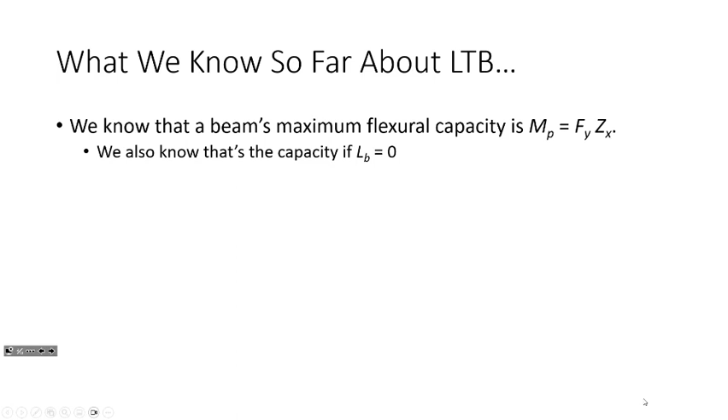Now, we do have an elastic solution for lateral torsional buckling. And the elastic solution is what I derived last time in the previous lecture, and we ended up getting a solution that looks like this. And to be clear, we are actually going to use this solution. Algebraically, it's going to look different, but it's the same equation. Now, that is an elastic solution, and you're going to see what I mean there in a bit.

Now, remember that our solution, when we did this, assumes that the moment is constant. We did that because it made the solution of the differential equation easier to do. But we know that bending moments are not constant. You all had a homework problem where they weren't. We had a moment diagram where the moments were variable. And we do have a way of correcting that solution with this term CB.

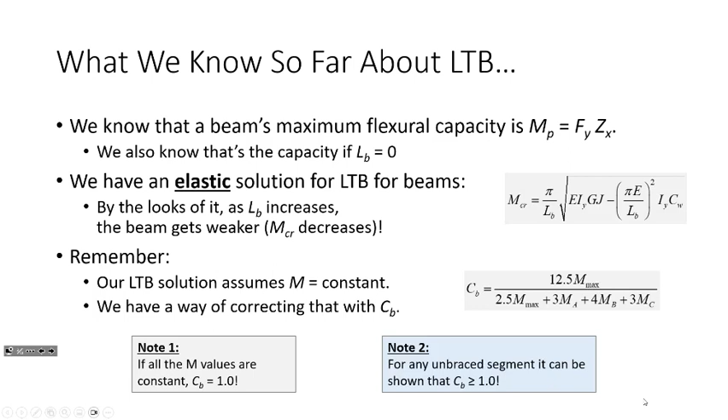Now, one of the things about CB is that CB is greater than or equal to 1. Every CB value that you computed on the last homework assignment should have been bigger than 1. And so what CB tends to do is increase the capacity. But no matter what you do to increase the capacity, it is limited to the plastic moment. So if I'm looking at my plot, whatever the plot looks like, I can't have a capacity above that line. It can't go over MP. That's the limit.

Now, in order to explain the flexural capacity expression for beams, I want to go back to columns for a bit, and I want to talk about how the column curve was arranged. If you remember the column curve, we derived a solution, and then we said that solution's great, but it's not good enough. And there were 2 reasons why. The first was geometric imperfections, the idea that columns are not perfectly straight or perfectly plumb.

But then the other aspect was residual stresses, the idea that there are stresses locked into the member that propagate yielding throughout the member faster than if we assume they don't exist. And so what we ended up doing is we had 2 zones of flexural capacity as it relates to column buckling. We had an inelastic column buckling range and then an elastic column buckling range.

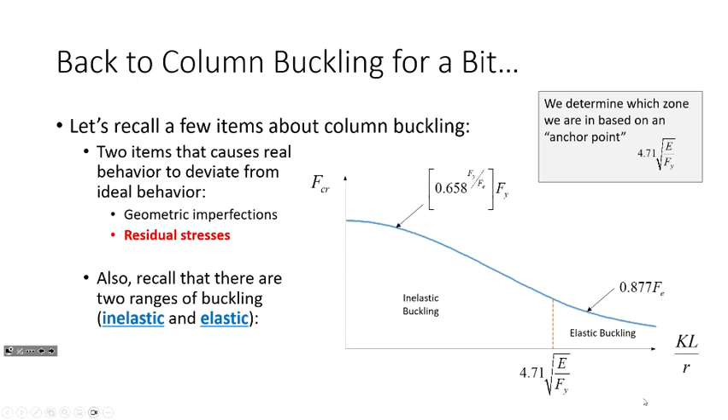And so what we would do is compute our slenderness and compare it to this value, and we would say, well, if our slenderness is less than or equal to this, then we're in zone 1, and this is our critical buckling stress. Otherwise, if we're greater than that, we're in our elastic buckling range. So we had these two zones to consider for column buckling. Does that make sense?

Okay, so now I want to talk about buckling for beams. For beams, we're going to have 3 zones of capacity. Now, the 3 zones of capacity are essentially as follows. We have zone 1, and in zone 1, what we assume is that the capacity is just MP.

It's just the plastic moment. And what we're saying in zone 1 is that the braces are so close together that we really don't need to consider the effect of buckling, and we can just assume that the capacity is MP. Then we have zone 2 and zone 3.

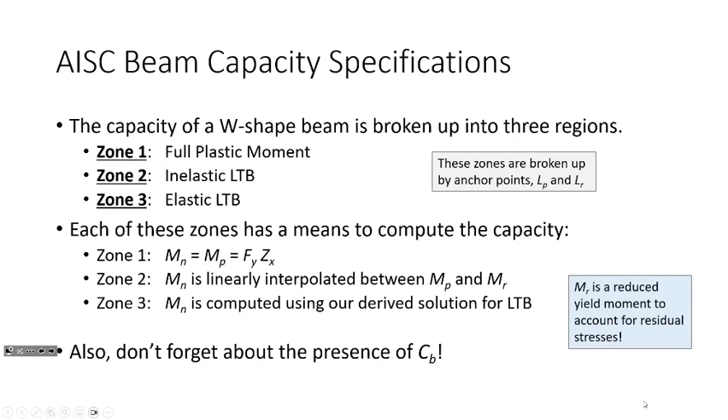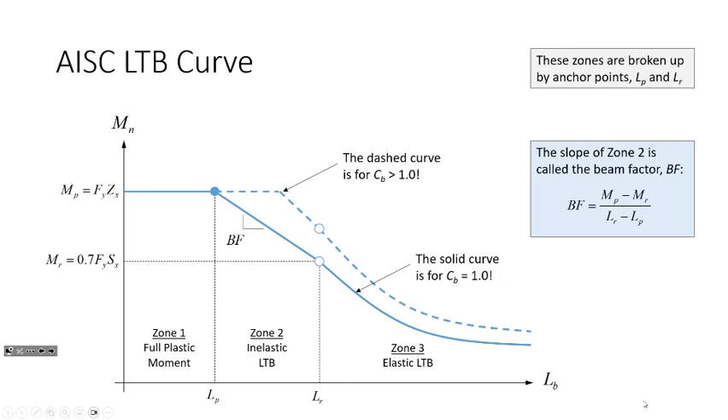Okay, so let's look at the capacity. Let's look at the terms a little bit. The first thing you need to do is figure out what zone you're in, and that means you need to determine LP and LR. Here are the equations, and I think that's the longest equation I have in any of my slides. But look, I have a smiley face, and I say relax. We'll see in a minute or two that we are not going to have to calculate this, but it is a very, very nuts equation.

Another thing that might be a little counterintuitive: if I were to ask which equation takes more effort to derive, it may be counterintuitive, but that one's a lot harder, okay? This one is actually just algebra, because all you do is take that critical buckling solution, set it equal to 0.7 My, and solve for the length. Yes, it's a nasty equation and there's a lot of algebra, but give it about half an hour and you could come up with this. This is actually pretty easy to derive. This one takes a lot of experimental testing, a lot of numerical modeling, a lot of judgment calls. It's not easy to arrive at what the cutoff should be for when you should consider buckling and when you shouldn't. This one takes a lot of work.

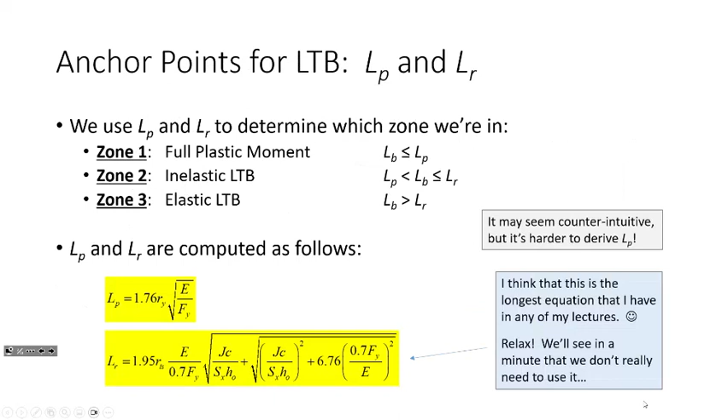But again, LP and LR, you are not going to have to compute, and I'm going to show you that here in a second. Now, to answer Mr. Odell's question, he was saying, wait a minute, what about that zone, right? If you are in zone 2, here's how zone 2 works. You basically compute the capacity assuming CB is 1, and then the answer is to take the minimum of the capacity times CB or phi Mp.

You just take the minimum. So you don't really have to find a new LP or LR, because in the end, the capacity is either going to be lower than MP or it's just going to be MP. So it's actually pretty easy, okay?

Now, if you open up chapter F and look at the expression for zone 2, this is what it looks like. It's kind of long, okay? But what I propose we can do is rewrite it in this fashion. I'm taking this term here and rearranging it a little bit, and taking this constant fraction and calling it BF because it's just the slope of the line. All this is just y equals mx plus b. That's really all this is. And this BF is the slope of the line.

Now, if you notice in this zone 2 expression, none of the phi values are in the spec. None of the phi values are in chapter F if you turn to 16.1-47. This is directly from chapter F. None of the phi values are in the equation, but the one I'm telling you to use has all the phi values. Why? Well, you'll see that here in a second. Because it's a lot easier than you would think.

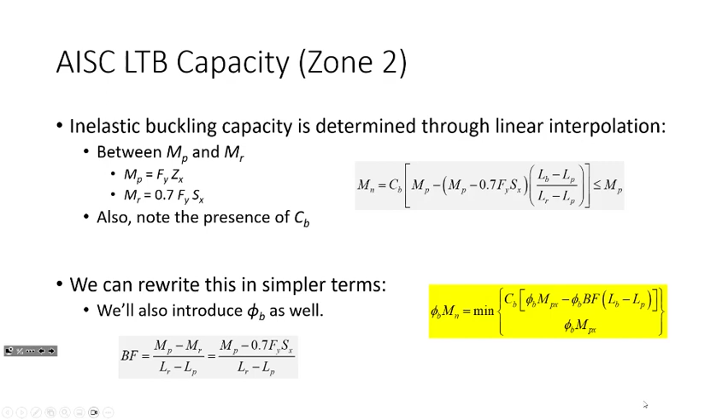Zone 3. Zone 3 is the only one that takes a little bit of effort. What we do in zone 3 is we compute this. This is the elastic critical buckling stress. And I'll tell you, this is actually the same solution that we derived. It looks different, but it is numerically equivalent. It's just been rewritten a bit.

We take the solution that we derived from the differential equation and just throw some algebra at it, so this is the same answer. But the reason why we wrote it this way is because this is the solution for compact W shapes. If you're looking at plate girders or other types of elements in bridges or what have you, the equations are somewhat different. But if you formulate it in this pattern, you find that the equations for W shapes and the equations for plate girders are very, very similar. So it makes it a lot easier for you as a structural engineer to handle routine elements and very non-routine elements with very similar math. It's really meant to help you all out when you're doing more complicated or more advanced steel design.

Now, when you're using this expression, you do need a lot more section properties. You need RTS, which is sort of like a radius of gyration for torsion, for LTB. You need a J, a torsional constant. You need a section modulus. You also need this term H naught. H naught is the distance from the center of the flange to the center of the flange, but you don't need to compute all that. If you go to Table 1-1, you can look all that up. The only thing you need that you probably can't discern right from the equation is this term C, and C is 1. C is 1 for I shapes. It only changes if you're looking at, I think, C shapes. There's a slight formula for that.

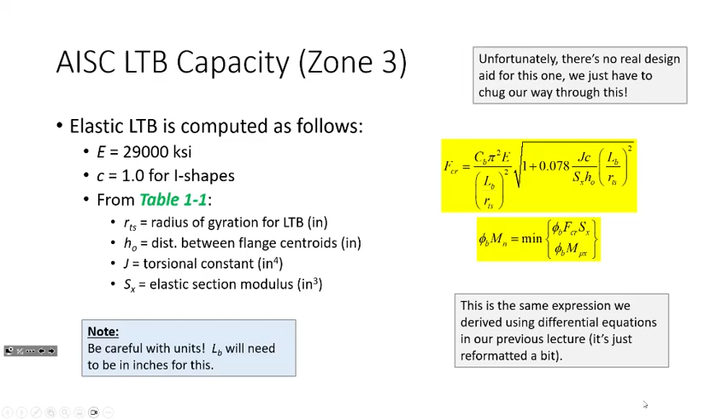So, why did I say that you don't need to worry about computing all this stuff? Remember Table 3-2? Let's open up Table 3-2. I told you by the end of this, you were going to know everything about what was going on in Table 3-2. I mean, look at all the data that is packed into this table. This is an incredibly useful guide. I think this table takes the cake for probably the most useful table in the whole manual. Because, look, we have our phi MP, but now we have phi MR. Remember, we weren't looking at that before. Now we have it. Now we know what phi MR is.

What about this phi BF? What is phi BF? Phi BF is the slope of that line, right? Done. What about LP and LR? LP and LR help us figure out what zone that we're in. We also have the moment of inertia, and we have the shear capacity.

And we will discuss the shear capacity during Monday of Dead Week. We'll talk about how to compute shear capacity. So, again, as we've seen so far, shear capacity doesn't really matter all that much, but we are going to cover it. So again, remember I told you there's this really nasty equation. You're never going to have to compute it because just look it up.

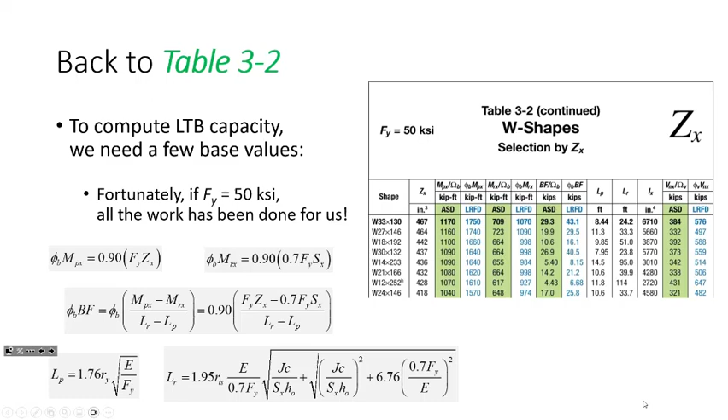Sound good? Now, what I have done here is I've taken all those equations and all that math and I've put it in this. This is one of those greatest hit slides. This is definitely one that you can put on a formula sheet. But basically, in this slide, this is everything that you need to know for flexural capacity of beams. This is probably one of the most useful slides I have in all of my lectures.

So if you're in zone 1, there's the capacity. If you're in zone 2, there's the capacity. If you're in zone 3, there's the capacity. Every term that you need, I even went ahead and threw the CB formula up there as well. So everything all packed in one single cohesive place. Very useful flow chart for you all going through some of these problems. All right.

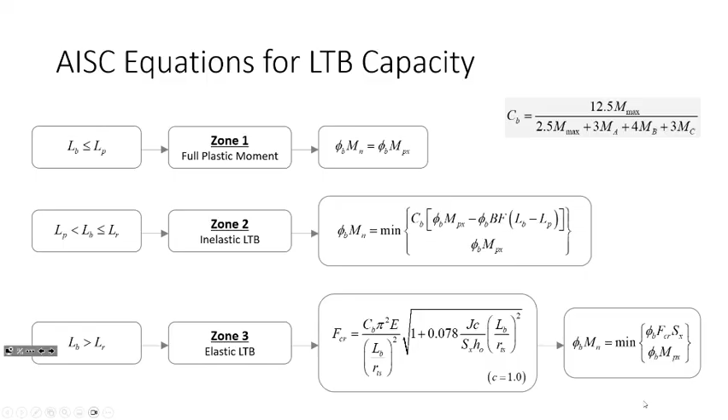All right, let me stop for a sec. I want to see if anybody has any questions. Okay. All right. So I want to go into an example, okay? But we're going to do this example, but I'm not going to give you a homework assignment today. I'm going to give you a homework assignment on Monday because we're going to do another example and make sure that we're comfortable with this, okay?

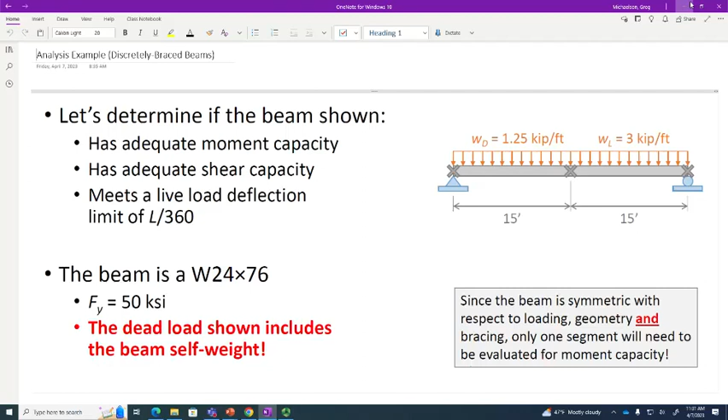So I really only need to look at one of them. And a good way of assessing that is to look at the CB terms, okay? So if you remember in the homework assignment, you can go to Table 3-1 and actually just look up the CB terms, right? And so for a lot of very simple loading conditions, we can look up CB. What is the CB value going to be for each of these segments? You should know because we just did this one. 1.3. 1.3, right? So CB for this segment, put this over here. So CB is 1.3 for each of these segments, and so really all we need to do is consider one of them. We don't need to worry about the MA, MB, MC, and max, any of that, because we can just look it up, okay? And so I found that in Table 3-1 on 3-18.

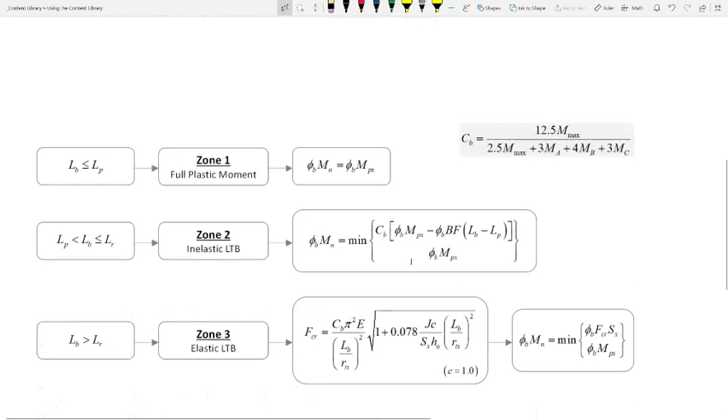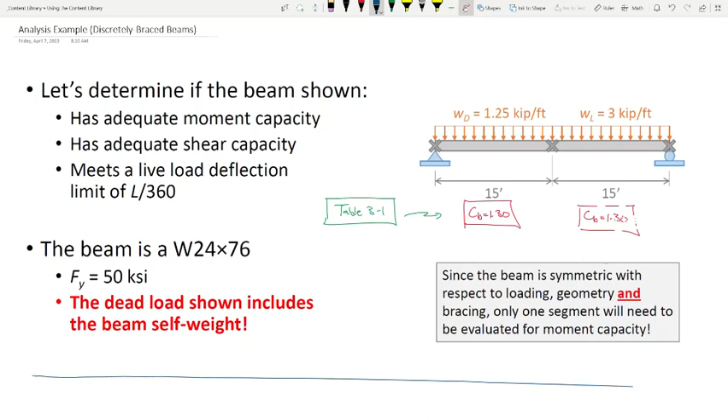Okay, all right. So let me scroll down a little bit. So first thing I'm going to do, let me take this and move it down a little bit. So the first thing I'm going to do is I think I need to determine what zone I'm in, okay? So let me do this, okay? So the first thing I need to do is determine the zone.

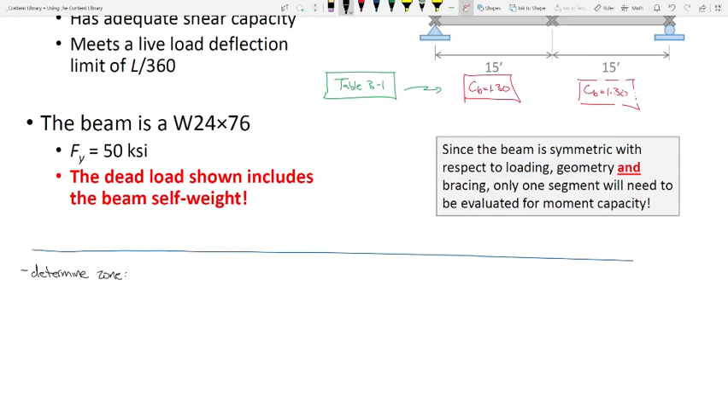Now, what is LB for this problem? Say it again? 15 feet, exactly. This is because that's the distance between the braces. What's really important to recognize is that LB is not 30 feet, it is 15 feet. 15 is from brace to brace, brace to brace. LB is 15 feet. Now, the section that we are looking at is

a W24 by 76. Now, if we're looking at a W24 by 76, what is LP and what is LR? Somebody help me out. For a W24 by 76, what is LP and LR? Has everybody brought their AISC 15th edition in? 6.78 and 19.5. Always have to do that. So 6.78 and 19.5.

So what zone are we in on this problem? Zone 2, right? Because LP is like 6.78 feet, LR is 19.5 feet, and we're at 15 feet, so we're about right there. So that's right in zone 2. So what I'll do is I'll say LP is less than LB.

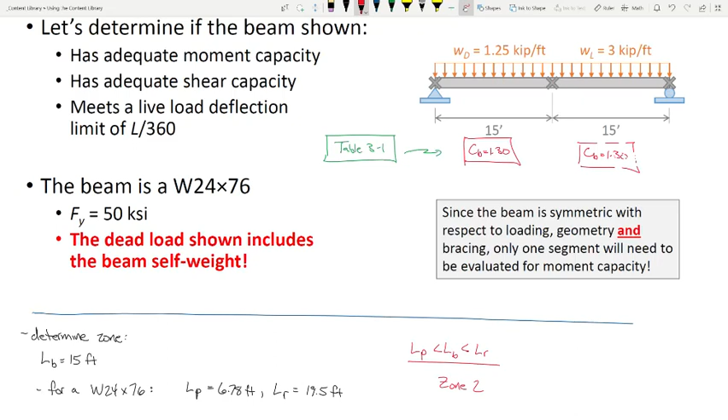Sorry. Wait, I'm sorry. My coffee hasn't kicked in. That's what I want. I need coffee. So, zone 2. We're in zone 2. Everybody with me so far?

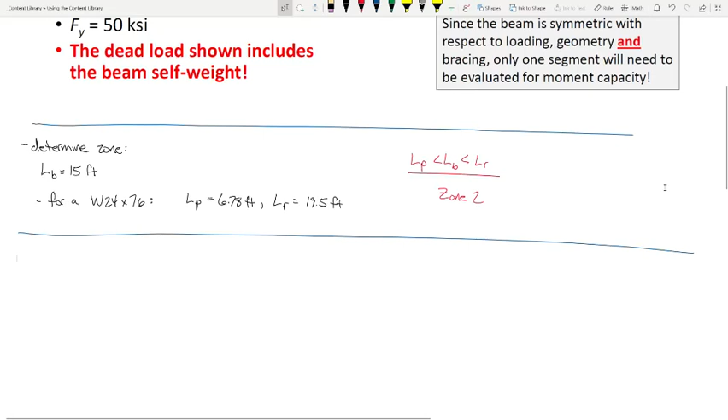Now, this is where this flow chart, I think, will really make your life a lot easier. So let me bring this back up here. I copy and pasted this flow chart from the slides right into the calculations. So I think we're all in agreement that we're in zone 2. So if we're in zone 2, this is our capacity. We're going to need some quantities in order to compute the capacity. What are we going to need?

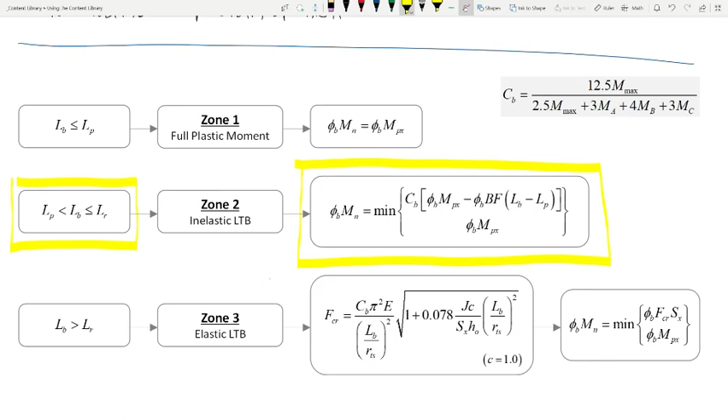We're going to need CB, but we've got that. That's 1.3. What about phi b Mpx? What is that for a W24 by 76? Do we need to compute it? No, we just look it up. What is phi b Mpx for a W24 by 76? 750. 750 foot kips.

What about our beam factor? What's the beam factor? That's the slope of this line right here. 22.6. 22.6 what? Kips. If you think about it, that makes sense that the units are kips, because we're talking about change in Y, which is moment, foot kips. So change in foot kips over change in feet, foot kips divided by feet, that's kips. We're going to need LB, but we already determined that's 15 feet. And we're going to need LP, which is 6.78.

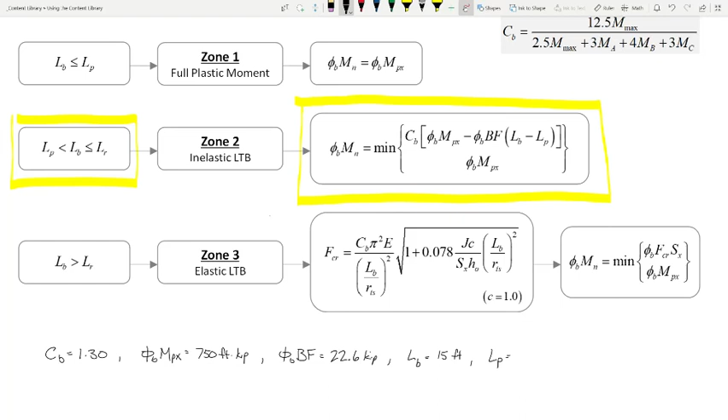So the way I'm going to handle this is I'm first going to compute this upper row inside right here. So, Cb times the quantity Mpx minus BF times LB minus LP. See, the equation looks really intimidating. It's really not, because it's just 1.3 times 750 foot kips minus 22.6 kips times 15 feet minus 6.78 feet. When we chug that out, what do we get? All this is, by the way, just linear interpolation on that line and then upping it by 1.3. That's all it is. 733, I think like 0.5.

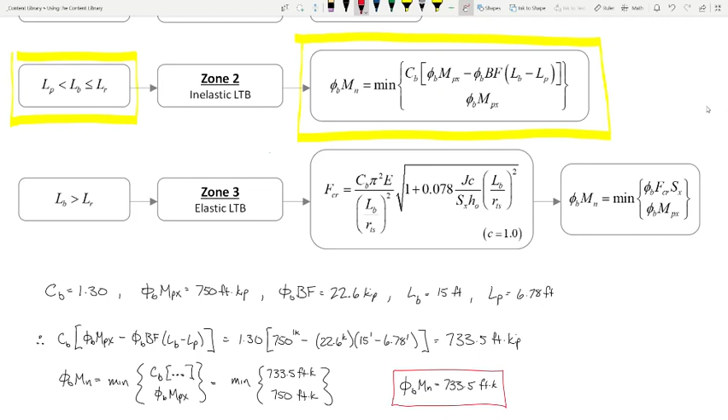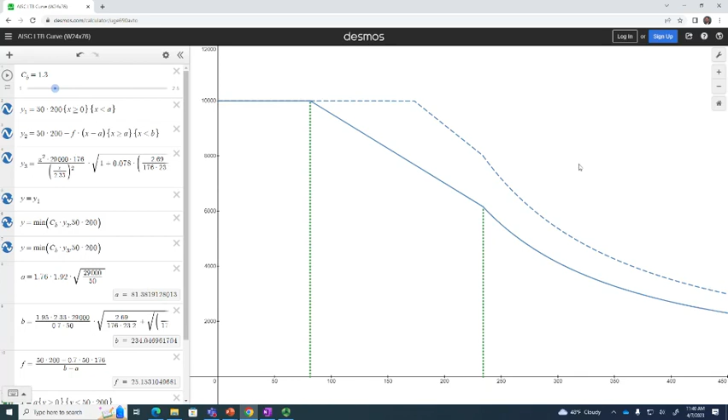Remind me, what was LP and LR? LP was 6.78 and LR was 19.5, was that right? All right. So I just want to take a look at something. If we go back to the Desmos plot that I showed you earlier, here's the Desmos plot where we can change the CB value. What was CB, 1.3? So that's CB. LP is 6.78, LR 19.5, and LB 15. What's 15 times 12, by the way? 180? So at 180, we're about right there, and if I go up, that's my capacity. My capacity is just shy. There we go. Everything's kind of lining up. Sound good?

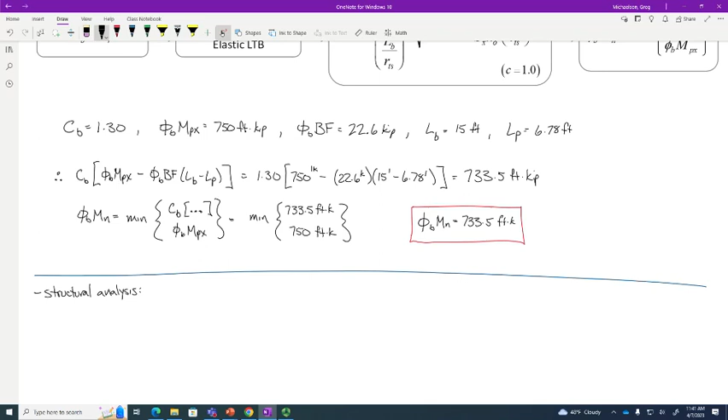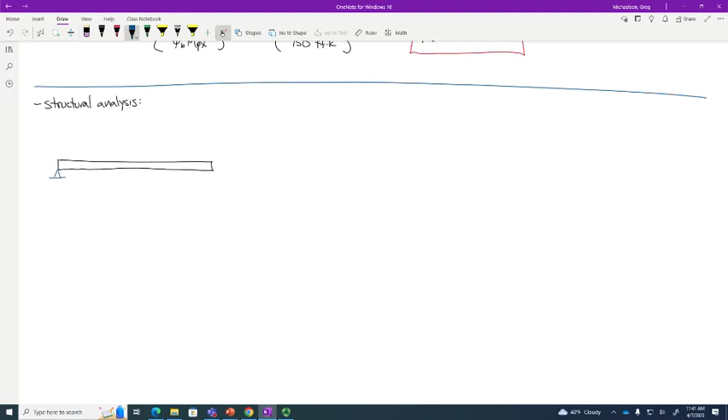If I wanted to evaluate whether or not this section is valid, I need to do some structural analysis. What I need to do is compute Mu and Vu and all that. Okay, can I go ahead and scroll away? All right. Remind me, the beam was this, and then we have a distributed load.

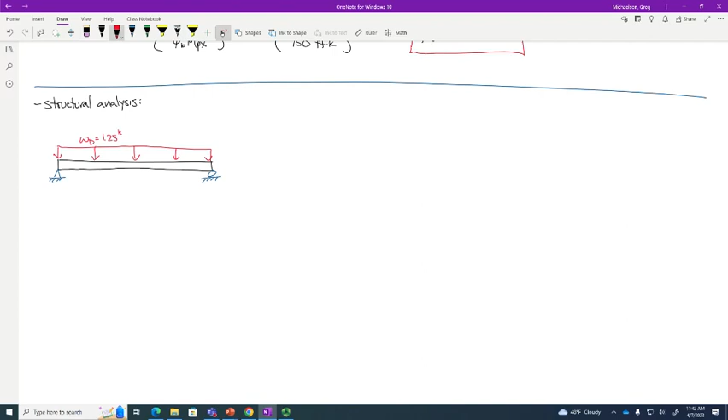We have a W dead of 1.25 kips per foot, a live load of 3 kips per foot, right? And by the way, I think we were told in the problem that the self-weight of the beam was included in this dead load, so we don't have to consider that 76 pounds per foot for the W24 by 76. It's already been included.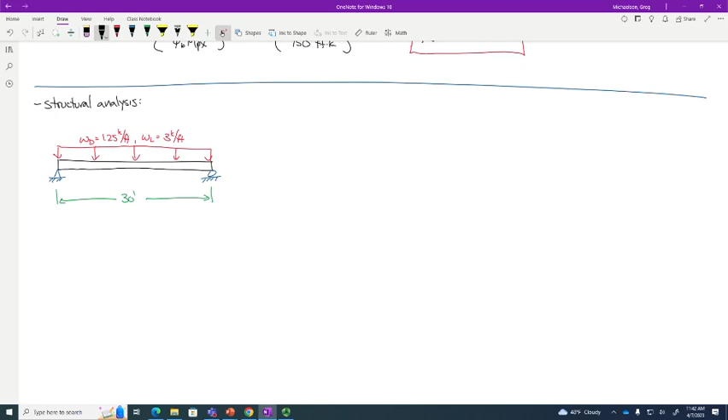So what we'll do is we'll say that our dead load moment is WL squared over 8. And I can go ahead and do that for you. I think it's 140.6, although you might want to check and make sure I didn't make any mistakes. Did I get that right?

Let me just go ahead and write this here. Phi Mn is 733.5 foot kips. So M dead is 140.6, M live is 337.5. And so therefore, Mu is 1.2 dead plus 1.6 live, and I think I'm getting 708.8. So is the beam safe? Yeah, it is, right? So what we'll say is phi Mn greater than Mu.

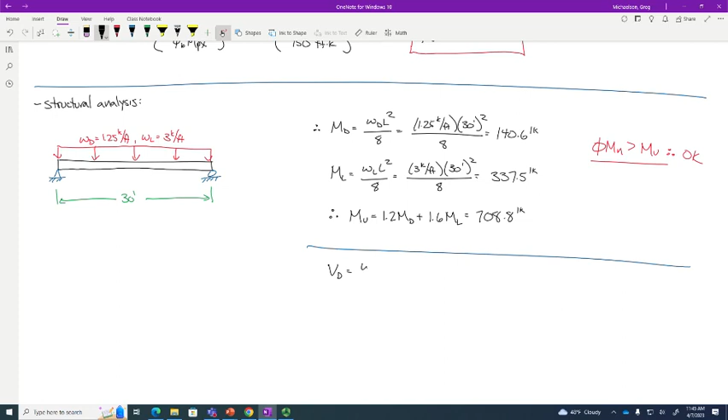Now, if we want, while we're at it, what we can do is a shear analysis. We can do a deflection analysis, but none of that is going to be any different than what we did before. So, for example, if we're looking at shear, shear is 1.2 times the dead load shear plus 1.6 times the live load shear. And when you chug that out, I'll go ahead and tell you, you get 94.5 kips.

But somebody help me out. What is phi Vn for a W24 by 76? 315. So 315 kips, right? So again, we've got a phi Vn of 315 kips and a Vu of 94.5 kips. Are we good? Yeah, we're good. Again, shear is not a big deal, right? It's just not a problem.

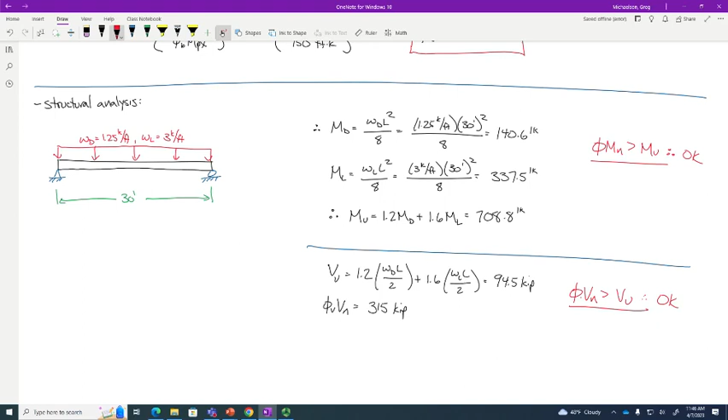All right. And finally, if we want to do the deflection check, again, deflection, no different than before. We have a W of 3 kips per foot, an L of 30 feet, an E of, what's the E for steel again? 29,000. There we go. Want that number burned into the back of your head by the time you graduate from Marshall University. And then I, what is the moment of inertia for a W24 by 76? Again, it's all in Table 3-2. Table 3-2 is just great. Everything you need is packed in that one guide.

Is the phi Vn value in that table too? Yes, it is. When it's all said and done, we're going to learn how to compute Vn, but I'm putting that off to the end because as we're seeing, shear's not really mattering all that much. We're going to cover it, but I'm not worried about covering it now. All right, what do we got for a moment of inertia? 2100. Oh, yes, sir. 2100.

So to clarify our notation, delta L maximum, this is the actual deflection, is 5 WL to the 4th over 384 EI, which is 3 kips per foot, 30 feet to the 4th, and then times 1728. Since we're running out of time, I'll go ahead and tell you that when you chug this out, you should get

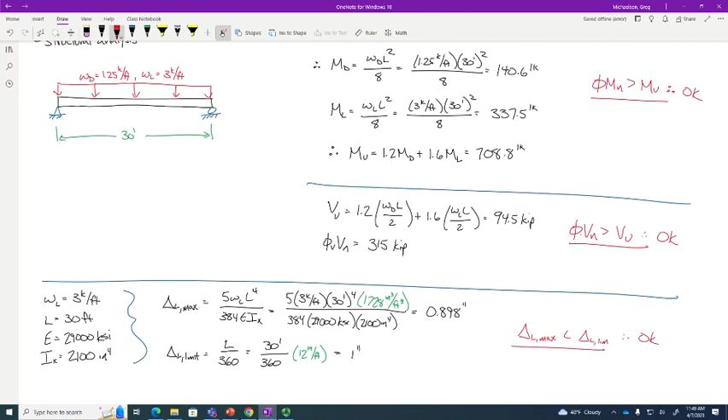0.898 inches, and then we can compare that against our limit, which I believe on this problem was L over 360. Is that what we were told? So L over 360. Deflection limits in steel design are very client driven, or there are some industry standards like L over 360. So 30 feet over 360, and multiply that by 12 inches per foot so that it all comes out in inches. 30 times 12 is 360, so 360 over 360 is 1 inch. So our max is less than our limit. So is the W24 by 76 adequate for this problem? Yes.

So what we're going to do today is not assign homework, because I want what we did today to sink in. On Monday, we're going to do another one. And the other one is going to be a different zone, because I think you should have some experience with zone 3, then we'll do an assignment. Once we're good with that, we'll talk about design. And designing for LTB, I'll level with you, it uses one of the craziest looking design guides ever. But it's actually pretty easy to use. And with that, that's all I got.